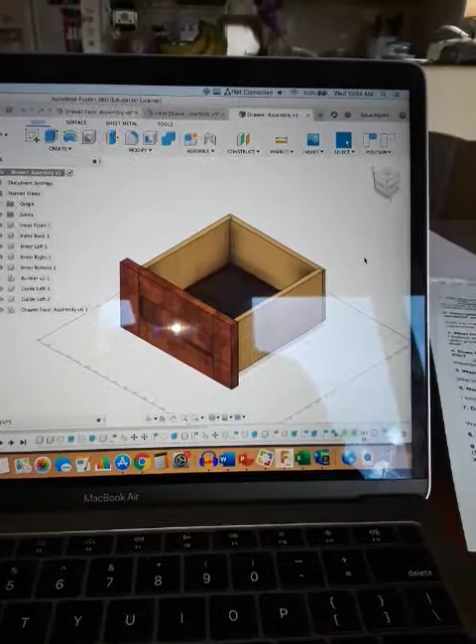This video is a tutorial on how to draw the drawer for our wood crafting project. On the screen you see our drawer, a 3D model of it. It's actually made of many different parts.

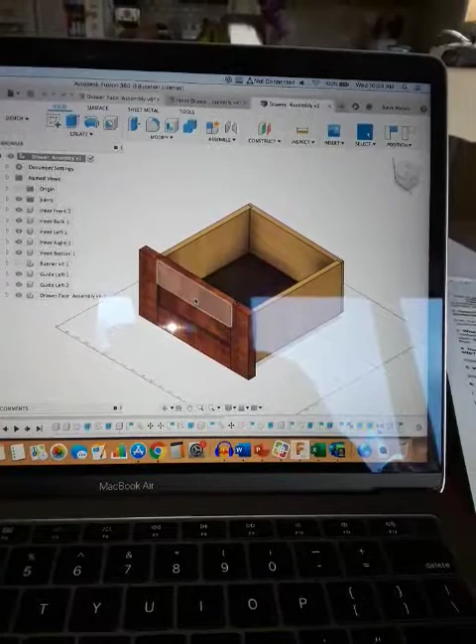I'm going to break this down into two main parts. The first part out in front is sometimes called the front or face of the drawer. That's the visual portion of it, made out of solid alder on the outside, and the inner member is a panel made out of plywood.

The second major part is the inner drawer, and that's actually made out of 5 different parts. So if we break this down into different main parts, here's the inner drawer.

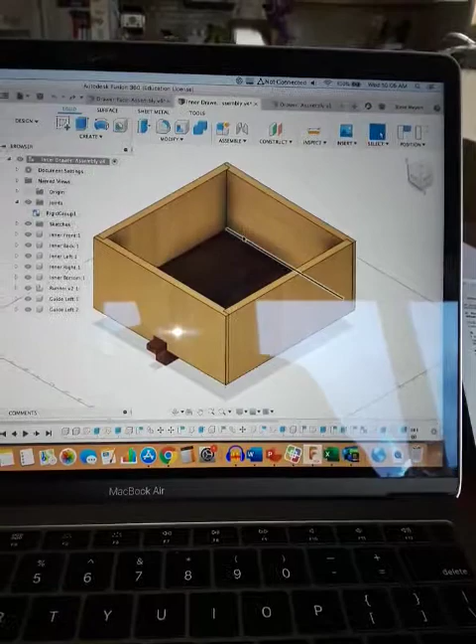I do have this component right here. Eventually we need to draw that. That's called a runner. The drawer would slide on that component, and that's why we have this notch here. But this is the inner drawer.

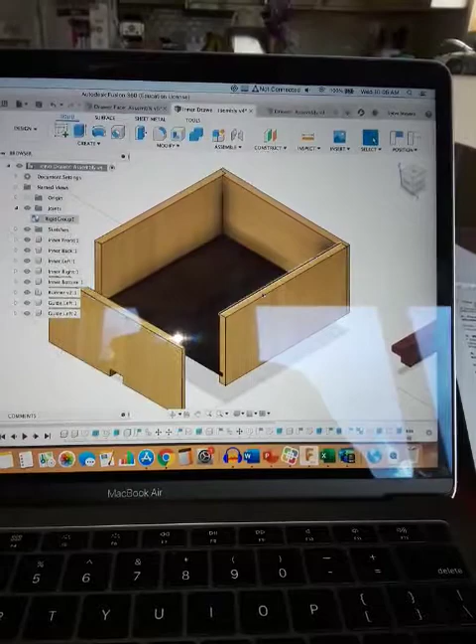You can see it's made out of 5 different parts. So what I need to do is break this apart here. Now you can kind of see how it goes together visually. We have front and back pieces. Those are distinct because they have the notch in them, which runs on the runner piece right over here. And then the left and right sides, and then the bottom piece.

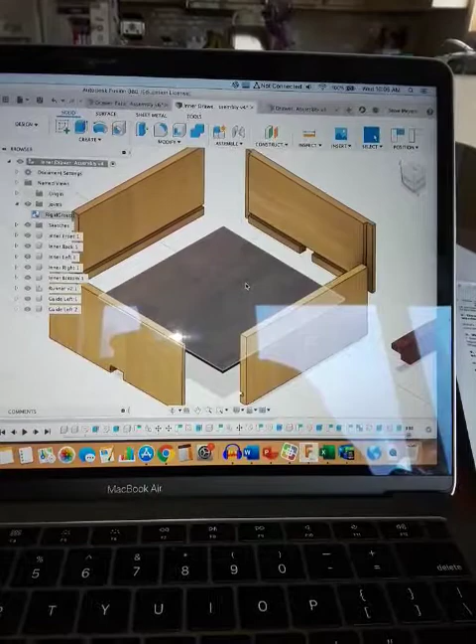So those are the 5 components that we're going to draw. Although the left and right sides are the same, and the front and back are the same, so really we only need to draw 3 components of the 5, since there are duplicates of each other. Okay, so that's the inner drawer.

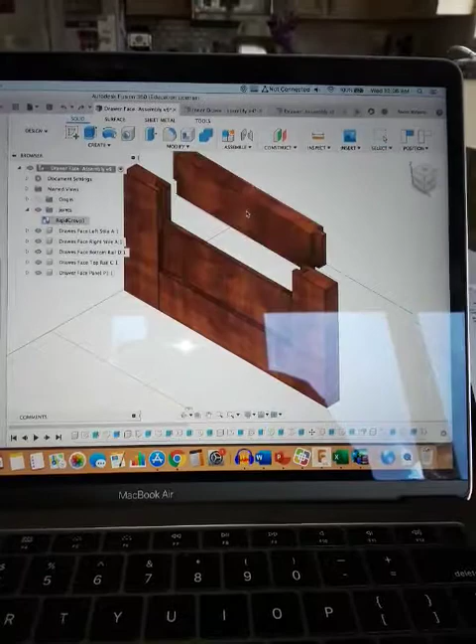Let's go to the drawer face. Here's the drawer face, and you can see it's made out of 5 different parts. The vertical members on the left and right sides are the stiles, and then the rails top and bottom, and the panel in between. So those are the components that we need to draw.

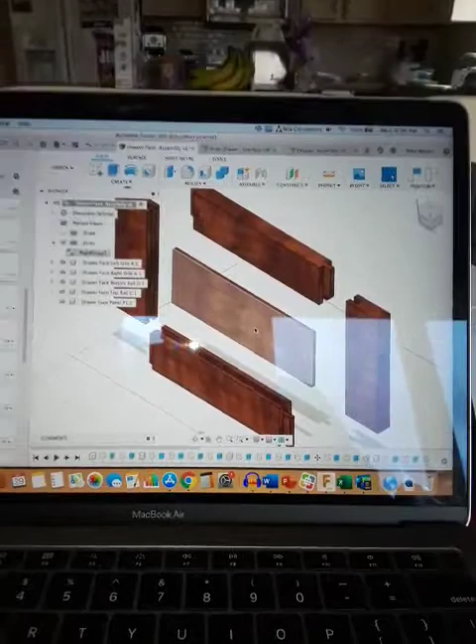Okay, we are going to do it on graph paper now. I'm going to pull back here and turn my graph paper sideways so we can fit all these drawings on. I went ahead and made a mini sketch on how we're going to lay this out on our paper.

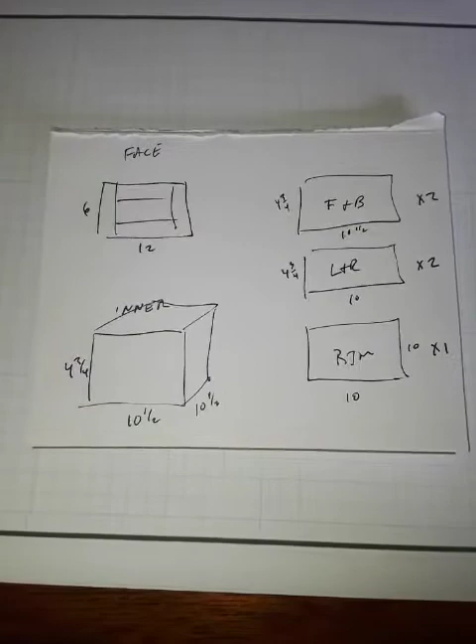Up here in the upper left corner of our page, we're going to have the face, and then the inner drawer, just a 3-dimensional drawing of it, and then a more detailed drawing of our front and back of our drawer, and then the left and right in the middle, and then the bottom. That's how we're going to lay things out for this drawing.

So I'm going to move this in here, and what we have here is some scaling that we need to consider. It'd be a good idea to pause this and write these scaling values down. If you're using graph paper, that's great. However, if you do not have graph paper, I want you to scale, and some of these values that we're going to need are right here. Go ahead and write those down.

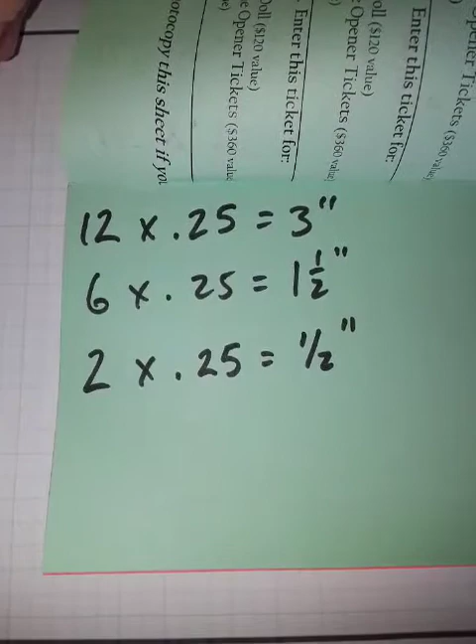I did the math there, and I'm going to flip this over so we can see a little bit more math. Over on the left hand side, in the upper left, 12 at a 1/4 inch scale would actually be 3 inches in length. The next one is 6 inches, and if we convert that to a 1/4 inch scale, it would be 1.5. And then 2, if we convert that, it ends up being 1/2 inch long. Again, good idea to pause and write those down, and probably not come back to these. So I'm going to pause myself.

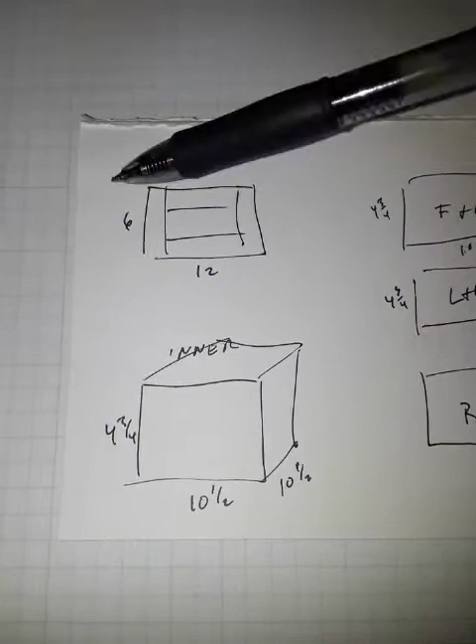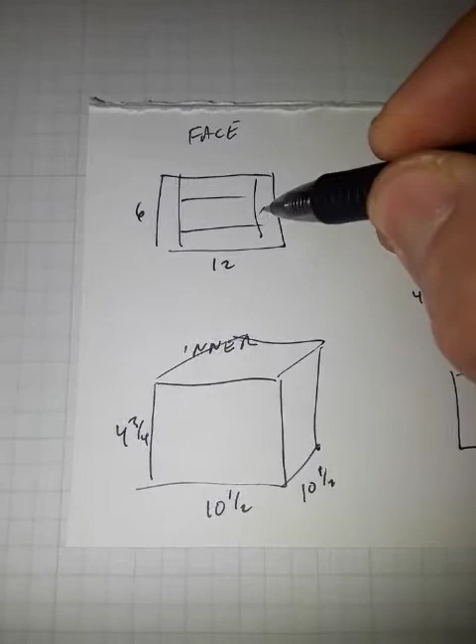All right, so I'm going to move on and start drawing the face, in the upper left hand corner. So 6 inches in height is its actual dimension, and 12 inches in width. Each of these members right here are 2 inches, so I guess I could write that right in there. Those are 2-inch member stiles and rails. And then eventually I'm going to come down here.

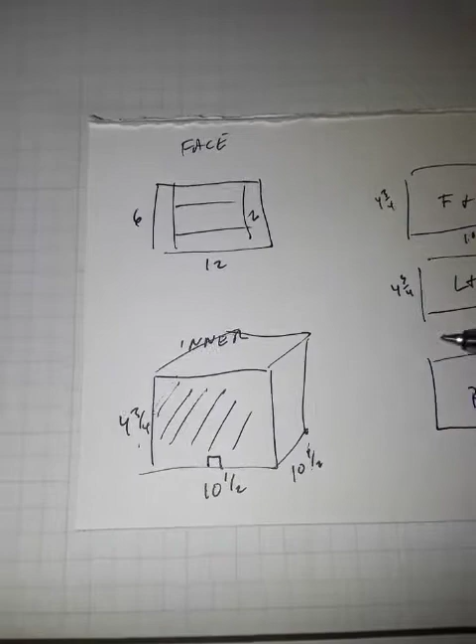What I'm going to do here is draw the front, and then I'll worry about the depth coming in. My height for my inner drawer is 4 3/4 by 10.5. Don't forget this little notch right there. And then I'll eventually come back and do the depth. So I'm going to pause here, start laying things out somewhere in the upper left hand corner. I'm going to take a little bit of time to make sure I have enough room, so 6 by 12, and then make all the connecting lines.

Okay, so as you can see here, I went ahead and made my dots outlining my 6 by 12 for my drawer face. So here's my dots, and I went ahead and down here in my inner drawer. The height is going to be 4 3/4.

Okay, let me bring this in and let's talk about this. So 4 3/4, that's really close to 5. That's an awkward number to convert into a 1/4 inch scale, so we're going to up that to 5 inches.

If we do that conversion, then we have 1 1/4 inches for our actual measurements there. So that's what I got. So if you're wondering why I went equal number of dots, or grids, on my paper, that's why. Eventually we'll go ahead and dimension it, so we'll see the actual measurement there.

Okay, so I'm going to pause here and start connecting the dots. Okay, so here's what I've done. I went ahead and made my box for my drawer face.

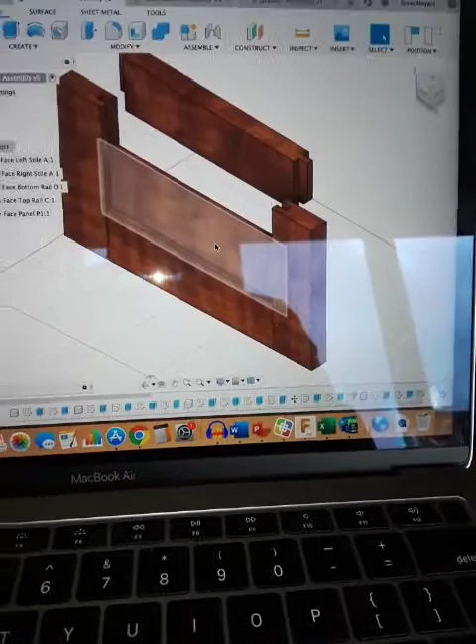So again, if I go back up to my drawing up here into the 3D model, there is our face. And in fact, if I put the front view on here, it's going to rotate, and now you can see that's the drawing that we're creating.

So I created these two outer members, called the stiles. Let me get on here. So here's the stile on the right, here's the left. Those are the ones I've drawn so far.

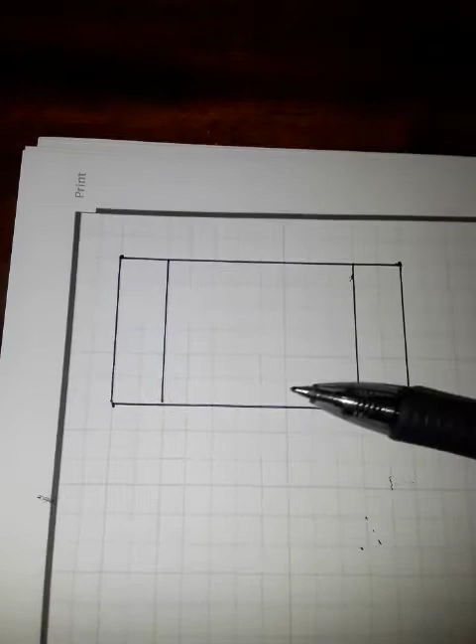Next I'll go in the rails. Each one of those is 2 inches, so 2 boxes of graph paper, or 1/2 inch.

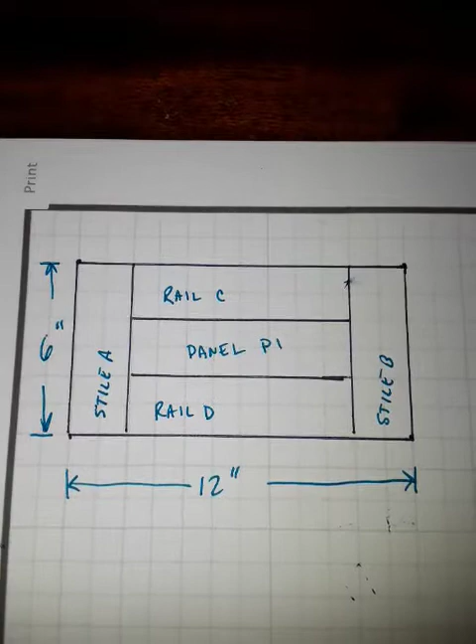All right, I went ahead and finished up my drawer face, and with my labeling, I dimensioned the 6 inches and 12 inches for my outer measurements, and then labeled my 2 stiles, A and B, left and right. Top and bottom will be rail C and D, and then panel P1 will be in the middle. Eventually, yes, we will create a parts list for this particular face.

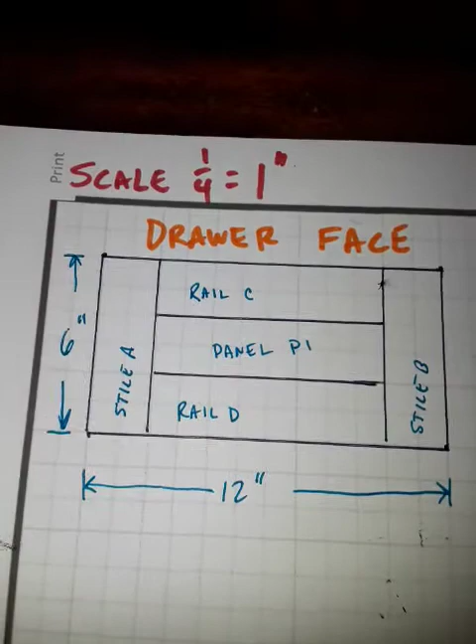All right, so some additional things. I did forget to put the scale in. That's one of those things I guess we are so used to putting in there, and I just forgot. So in the upper left-hand corner, my 1/4 inch scale. And then of course 1 box equals 1 inch over there.

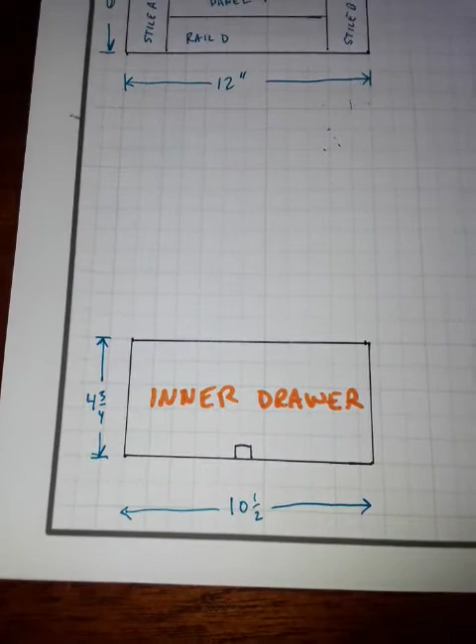So I do want to label that. I did go ahead and label what that drawing was, is the drawer face. And then I went ahead and came down here. I did go 5 boxes, but I am going to label that 4 3/4 by 10 1/2. So go ahead and lay that out.

This little notch right in here is just to visually make that work out. It is right in the middle. Go about 1/2 box up. All right, so I'm going to pause, and then we're going to continue with the inner drawer 3-dimensional drawing.

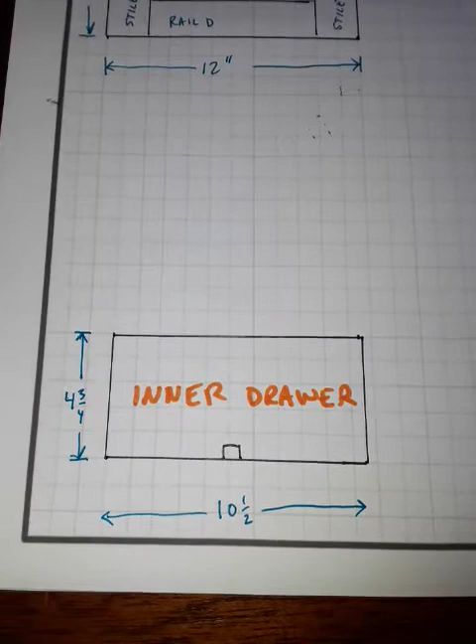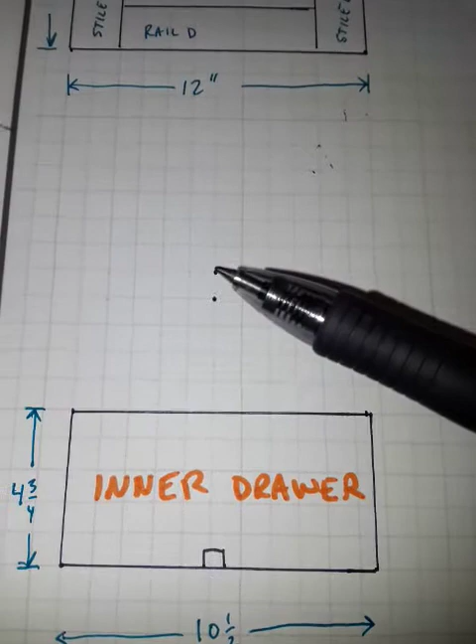So to get the depth here, I messed up on that dot, so forgive me. I went up 5 boxes, and then over 5 boxes. If you're doing this without graph paper, 5 boxes would actually be 1 1/4 inch. So I went over 5 boxes to the right and up 5 boxes to get that dot right there.

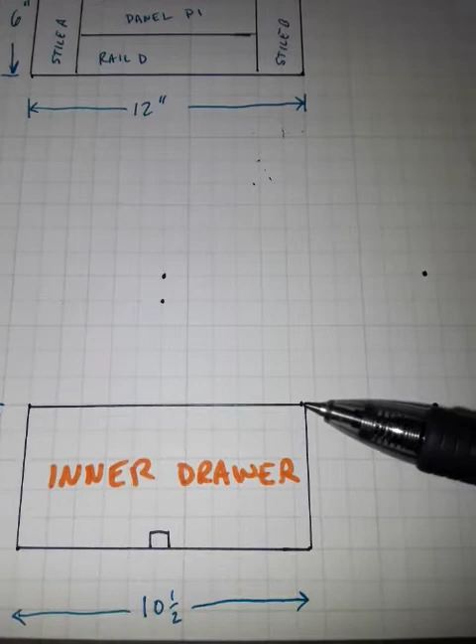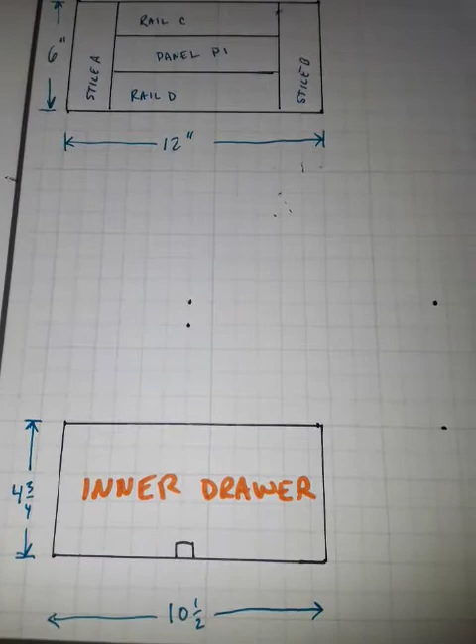And I'm going to do that same thing with each of these points. Even though I'm in a half of a box here, I'm still going to count 1, 2, 3, 4, 5, come up 5. Now this dot you see here ends up being this same ratio, over 5 to the right, up 5. So I'm going to be connecting here with a line, from here to here, from here to here, and then eventually connect horizontally, then vertically. Again, up 5 to the right 5, or if you do not have graph paper, that is going to be 1 1/4 inches.

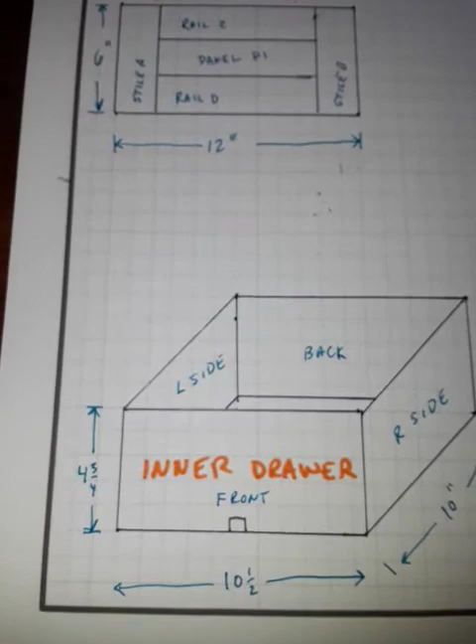So this portion right in here, we need to draw this vertical line right down here, but instead of going 5 boxes, which would run into this box, I really should have probably went 4 boxes, but I went 4.5 just to show that detail in there. So my mistake could be your learning, on that aspect of it.

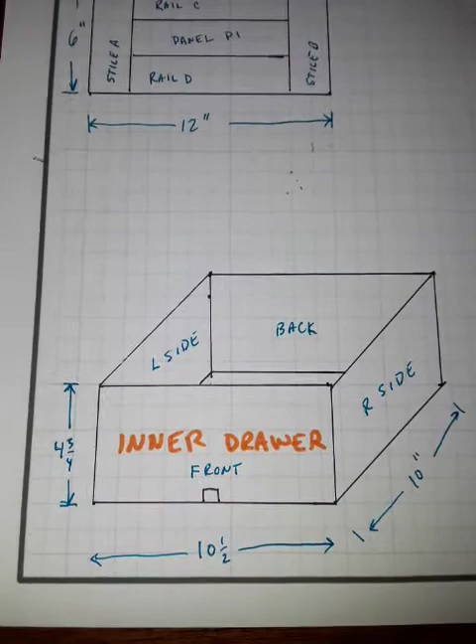So we do want to show that it does have a floor to it, so to speak, or a bottom to it. That really wraps up the inner drawer, and then eventually here we're going to move on to the individual components for each of the inner drawer here.

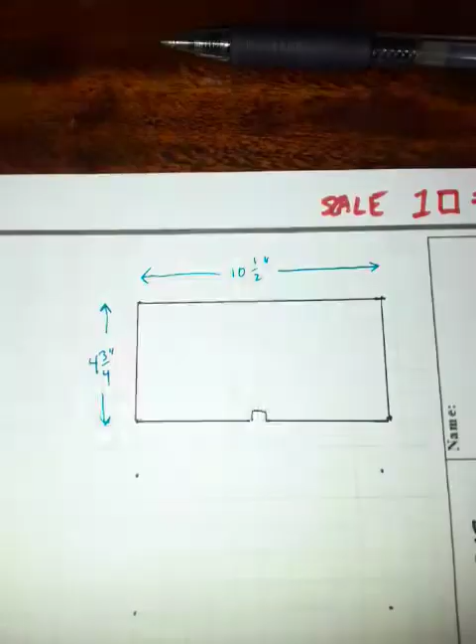All right, so I went ahead here a little bit. This is going to be the front. I don't have it labeled yet, but I'll eventually put the front on. And I got to be careful here. I do want to create this notch, so a line coming across here like I did over here is not really ideal. I kind of messed up there, so again, my mistake is your learning.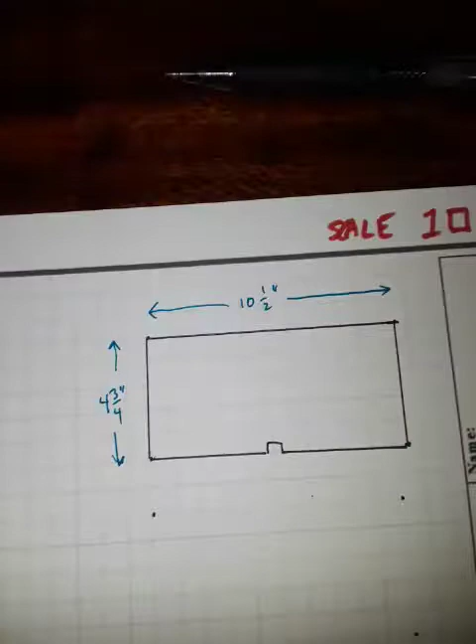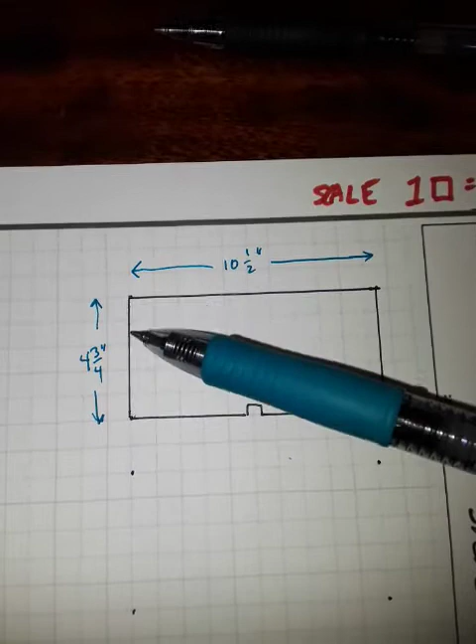As I create this rectangle, I do want to create a 1 inch by 1 inch notch. So visually just get that to make out. It will be in the middle, right in the middle of our 10.5. 10.5 inches by 4 3/4. However, I did go 5 boxes, which would be 1 1/4 inches. Remember our scaling from prior sheets. And then 10.5 is represented by 2 5/8 inches if you do not have graph paper.

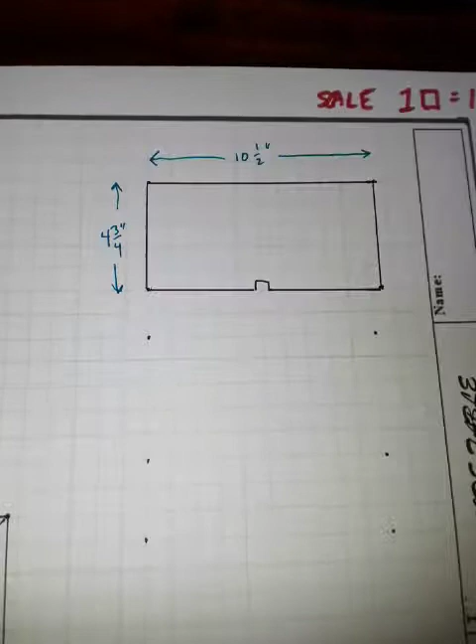All right, so I did go ahead and make that rectangle, and we'll go on with some further detail, but why don't you get caught up?

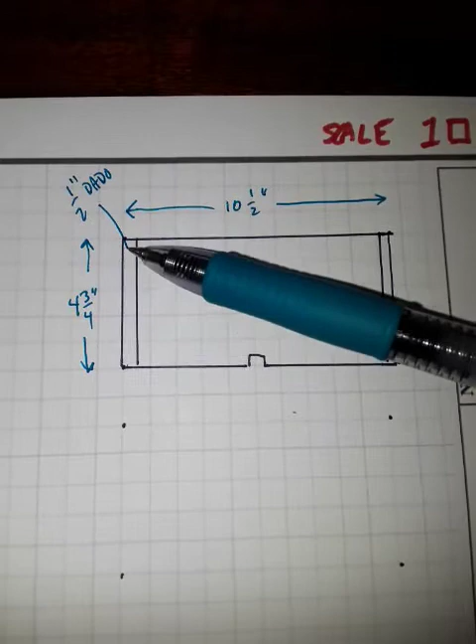The extra detail that I added here is the dado. I have a 1/2 inch line here - well, I shouldn't say that. I'm going to say that it's a 1/2 inch cut. It's called a dado cut. Visually, I just want you to make it work out. It is going to be on both sides, so I'm just going to specify it on one side, but visually make this work out, just to represent a line that there is going to be cut on both ends of this particular piece.

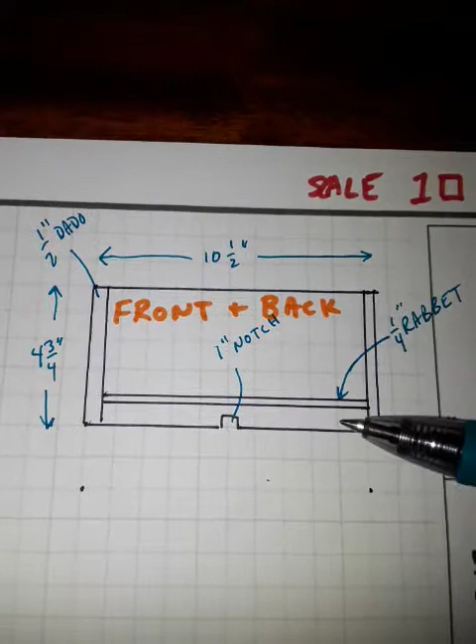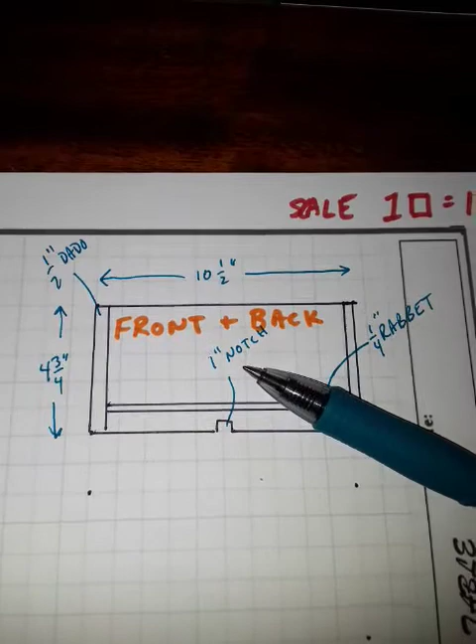All right, I'm going to add the rest of the information for this particular drawing. So the next line I put here is a 1/4 inch rabbet. That's a groove that's going to run left to right. Our bottom is going to fit into that groove. Again, that is a 1/4 inch rabbet. Also, what I've done there is put a label here for a 1 inch notch, so let's label that. Then also I labeled this as the front and back - the front and back pieces are identical, so we do not have to draw 2 of them.

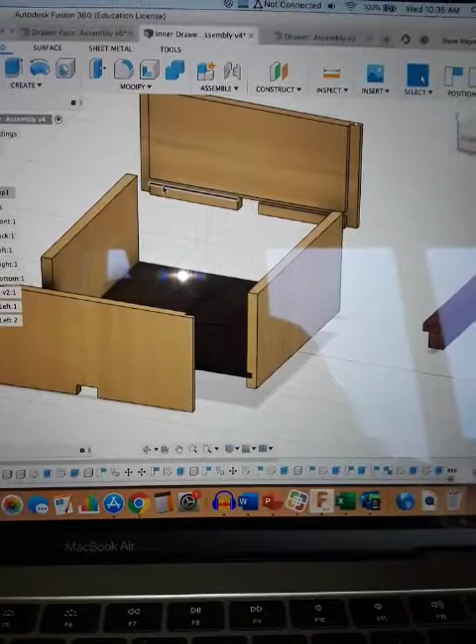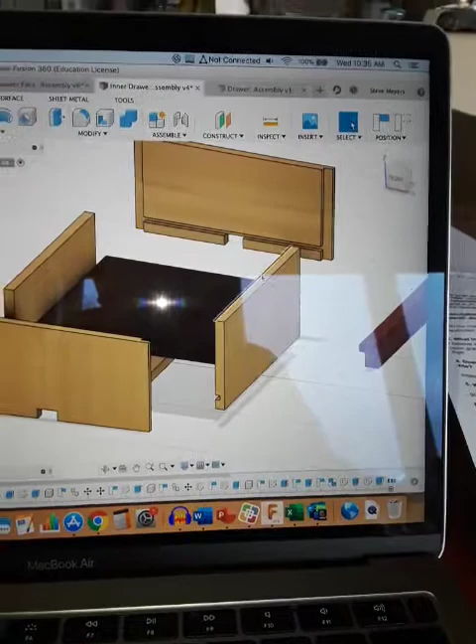Okay, so let me just show you up here on my 3D model. Let me just bring this piece back here. So here's the drawing - this is what the dados and rabbets look like. So the groove that we just made is called a rabbet. It is right here, and this fits right into there. And then this dado back here is where the sides will fit into. Visually, why are we making those and what do they look like? In our 3D model, we can get a really good look at it. All right, so again, let's go back and let's finish up that portion, and we're going to move on to the left and right sides.

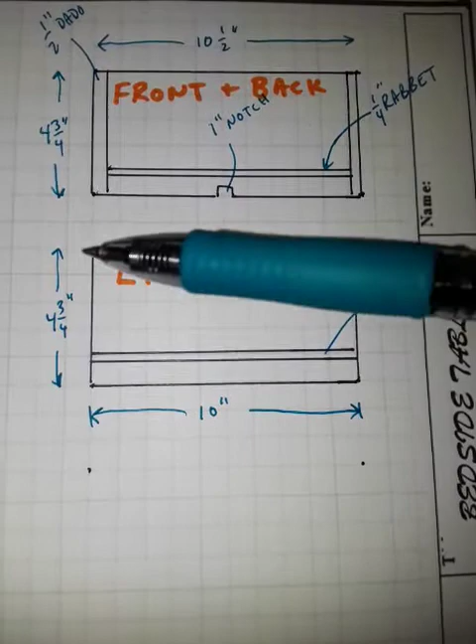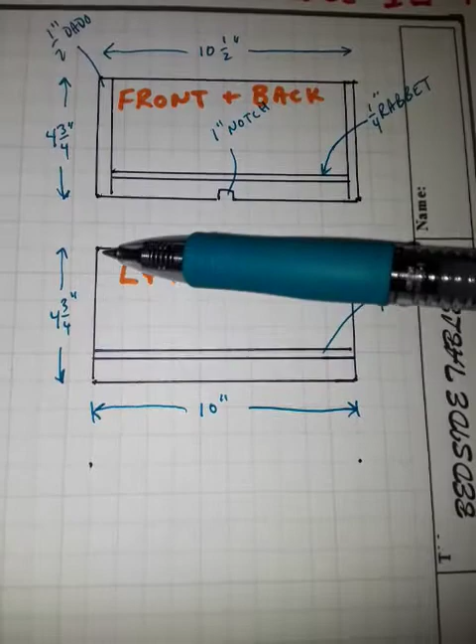All right, now moving on to the left and right sides, you can see I just went ahead and made this. I think we should be able to work from here. So I went ahead and made my rectangle on the outside. My dimensions now is going to be 10 rather than 10.5 like it was up here. So 10 inches, that ends up being 10 boxes on graph paper, or 2.5 inches without graph paper. All right, so again this is 4 3/4. However, we went 5 boxes or 1 1/4 inch.

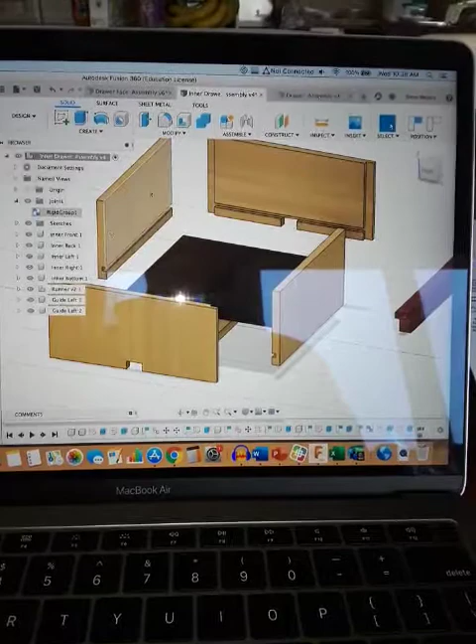Okay, so again, that's our left and right sides. Here's our 1/4 inch rabbet. We do not have to have the dados in the left and right sides. So again, if we go back up here to our 3D model, if I pull this up, sure enough you can see it has the rabbet in there, but no dados on the left and right side. Okay, so why don't you go ahead and work on the left and right sides.

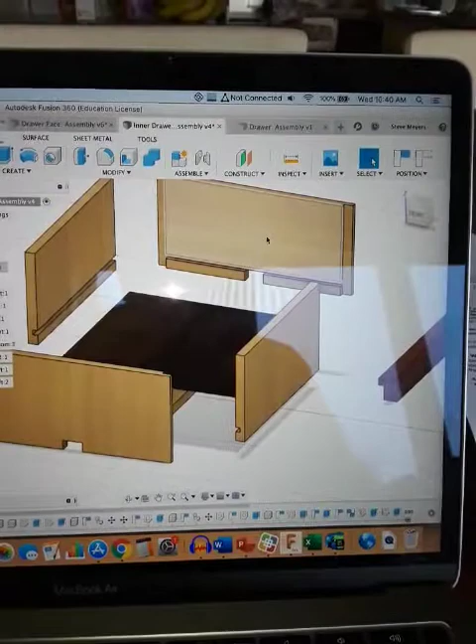All right, one additional detail that I added is the 1/2 inch MDF. That's the material the inner drawer is made of, at least the front and back and left and right sides. So again, if we go up here to our 3D modeling, you can see the wood is a different tone because that is a different material than the bottom, and thickness for that matter. So again, this material is 1/2 inch thick, and it is made of MDF, or medium density fiberboard - essentially particle board, medium density dust, sawdust, really kind of glued and pressed together.

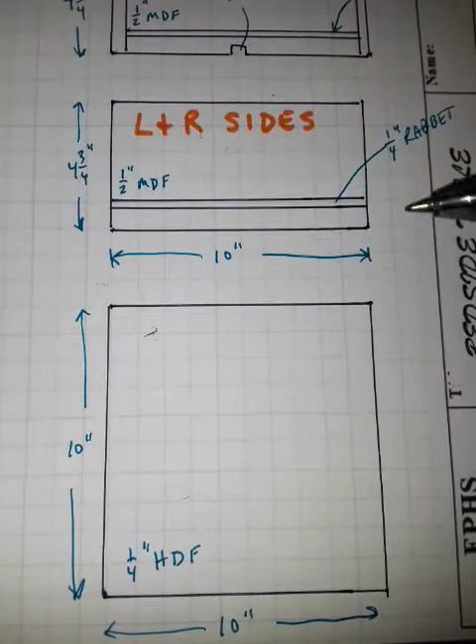Nice material. This material down here for the bottom is 1/4 inch thick, and we call that HDF, or high density fiberboard. Again, finer materials, finer particles pressed and glued together into a nice 1/4 inch thickness material. It's a little heavier, denser, and that works out really well for the bottom.

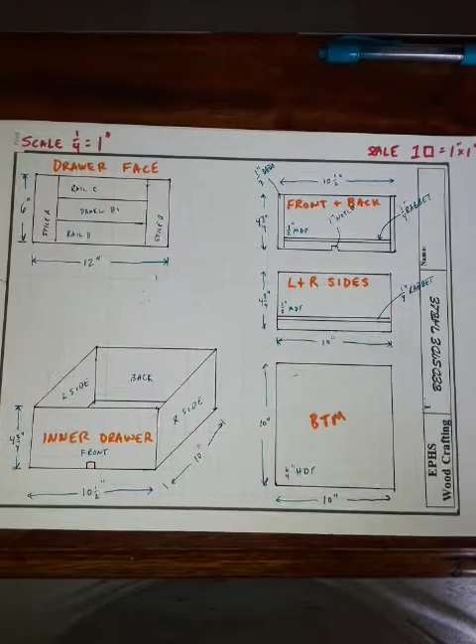Okay, so I did go ahead and start the bottom. You need to do a little bit more labeling. So 10 inches by 10 inches, here's our box, and I'll come back and label that. All right, there's my label, and I believe we have just completed the entire thing. So I'm going to come back out here so you can see that is our drawing. So follow the instructions how to submit that. Nice job.